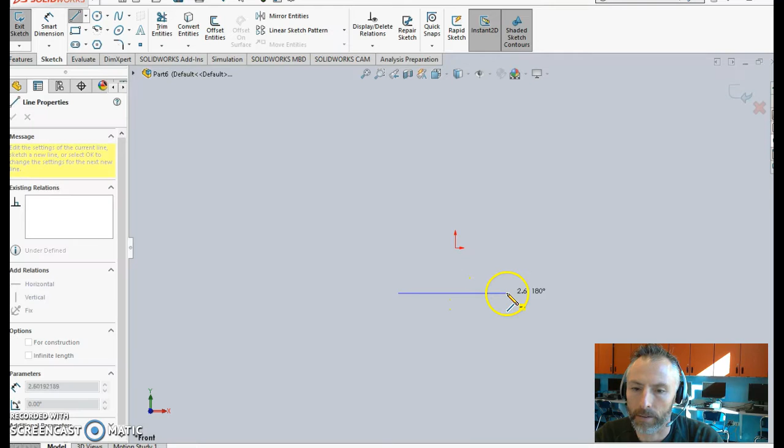What we know is that its bottom part is normal, its height is normal, but then it doesn't quite come out all the way, and it doesn't go all the way down. So it's going to look something in the ballpark of that from the side.

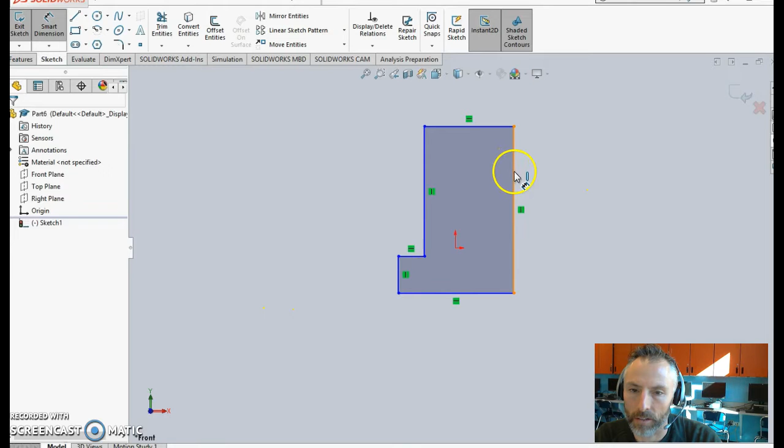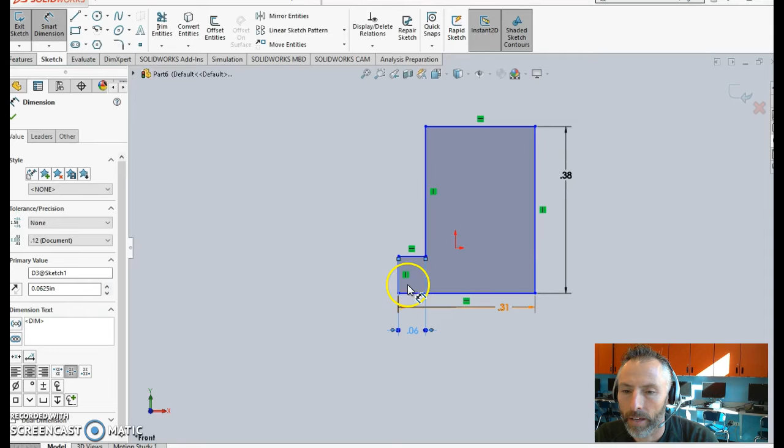Okay, so we're going to go with some dimensions we know. We know that the standard height for a Lego is 3/8. We know the standard width of a Lego is 5/16. We know that this little notch is going to be something just small, and we're going to call it 1/16. And we're going to call the height of it also 1/16. Okay, so it's going to look something like that.

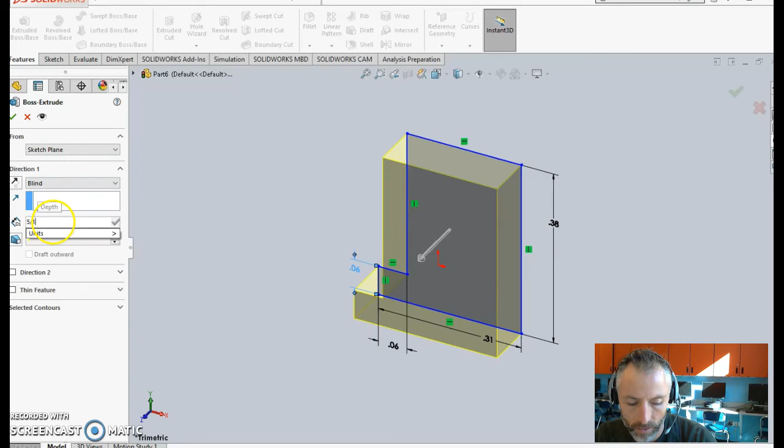And we can now go extrude, and we'll extrude it the standard width of 5/16, and we'll say OK. Now we need a couple knobs.

We're going to need a knob on top, and we're also going to need a hollowed out knob on the front. And we're going to have to cut out a little square area on the back, and we're going to shell the thing. Okay, so that's a lot of different features into this.

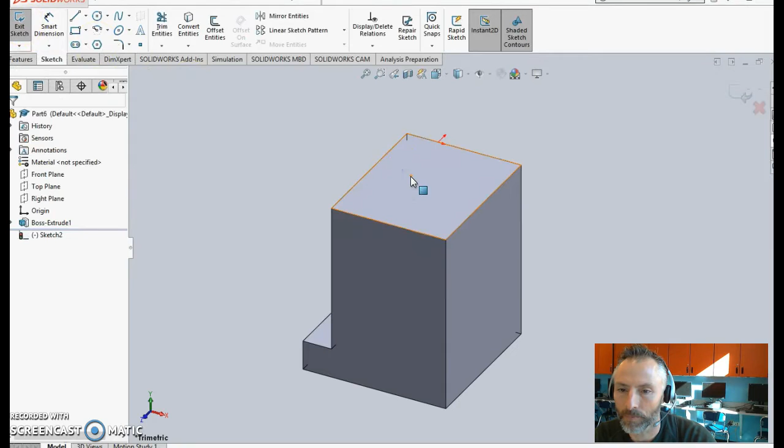Let's start with the knob on the top because that's the easiest. And we'll throw a sketch up here. And let's go ahead and look directly at the top face. And we're going to go circle. We don't know exactly where it's going to go, so we'll just throw it somewhere right about there. And we'll make sure that he has the right dimension. The diameter should be 3/16.

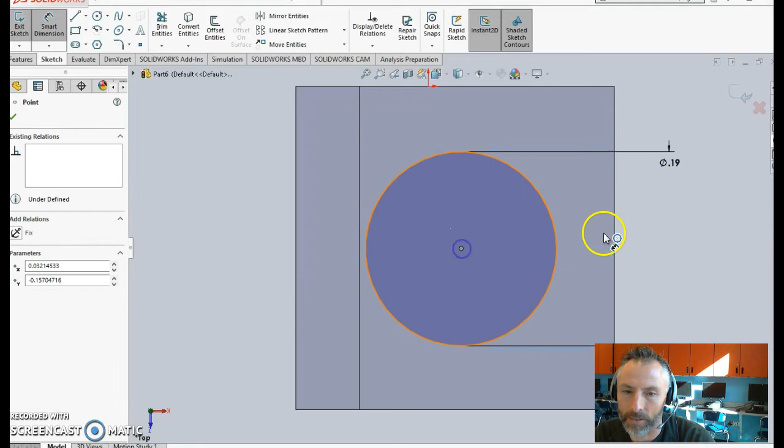And let's make sure he's the right distance. From the side, it needs to be half a Lego width, so it's going to be 5/32. And from the top, 5/32.

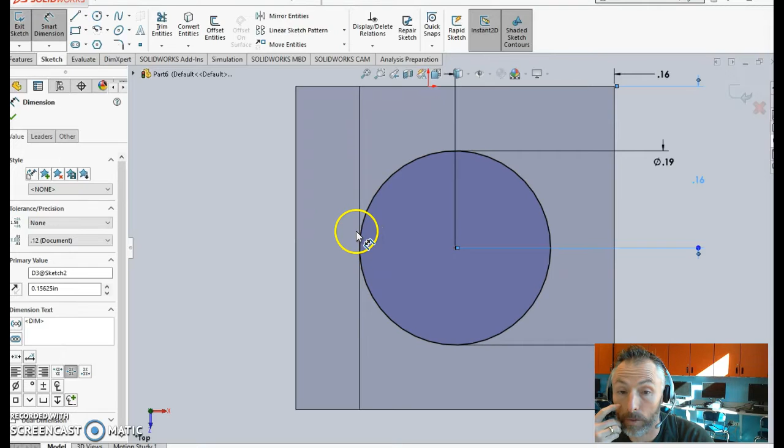And what you're going to see, that's going to automatically put the circle tangent to this little cutout, which makes sense. You have a 1/16 of a space right there, and a 1/16 of a space right there. The diameter of the circle is 3/16. So 1/16, 3/16, another 1/16 is 5/16. And if you remember, the whole thing was 5/16 of an inch wide. So it all adds up correctly.

We're going to go and extrude this little knob. It only comes up a 1/16 of an inch. So it's going to look like that.

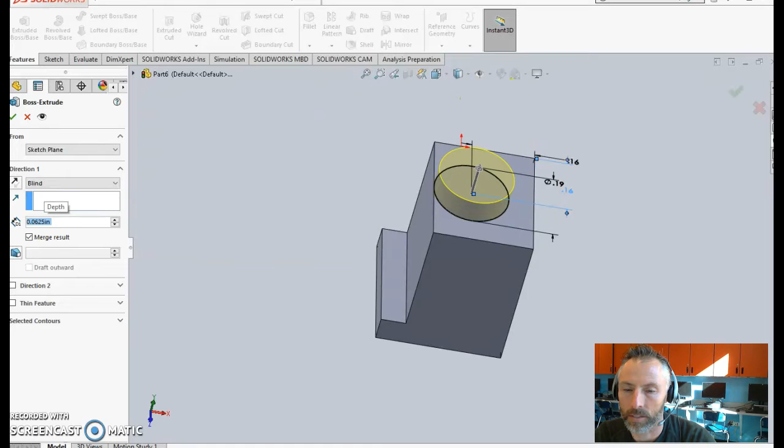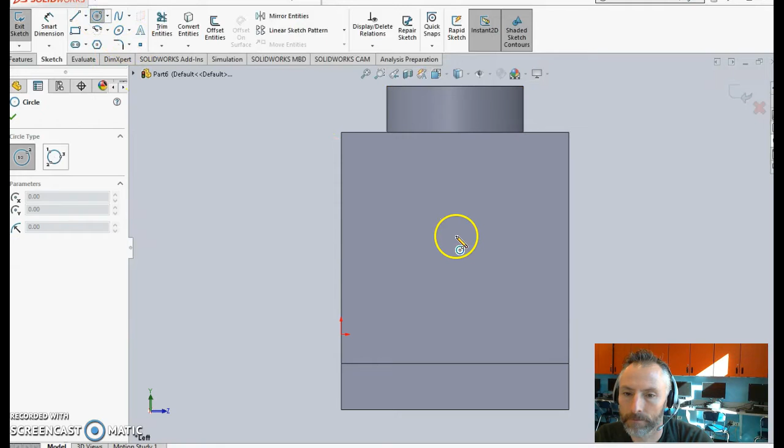Let's go ahead and do the knob that is now on the front. So let's put a sketch. And we're going to put it right on this face right here, which I believe they would consider to be the left face. And we're going to put... actually, I take that back, we're going to put 1 circle.

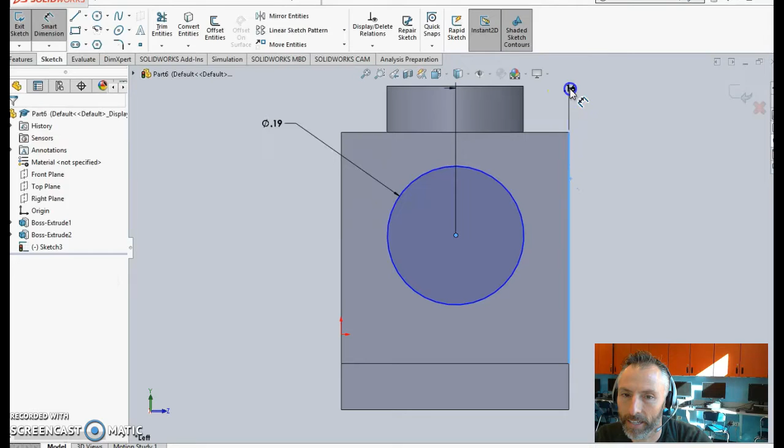And like all circles, it's going to be 3/16. And from the side is 5/32 like always, because that'll center it. But here's the tricky part. How much do we offset it from the top?

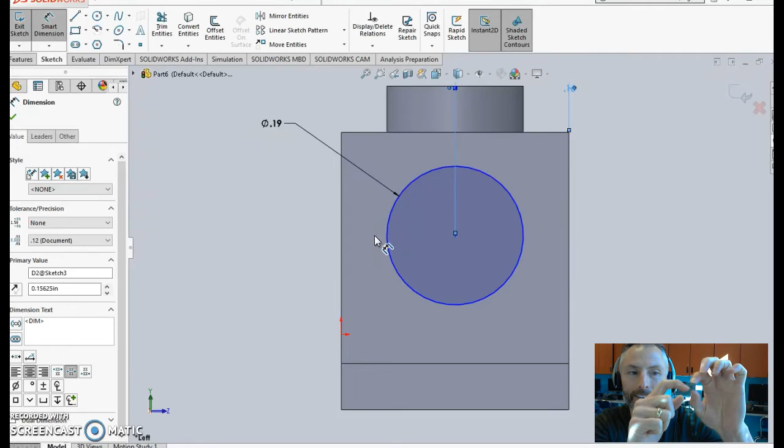Okay, if you look at this, that circle is actually slightly higher when you compared to the total height of the Lego. It's not perfectly centered, but it is centered between here and here. So with this, without this notch on the bottom, it is actually centered.

And you're probably like, well, what's he even talking about right now? Which is fine. So what we know, the total height of the Lego from here to here was 3/8 of an inch. But we have a 1/16 right there. So that 3/8, the total height of 3/8 is the same thing as 6/16. We have 1/16 right there. That means from this line to the top is 5/16, which means half of that is 5/32. So that is now centered within this face when we ignore this bottom ledge.

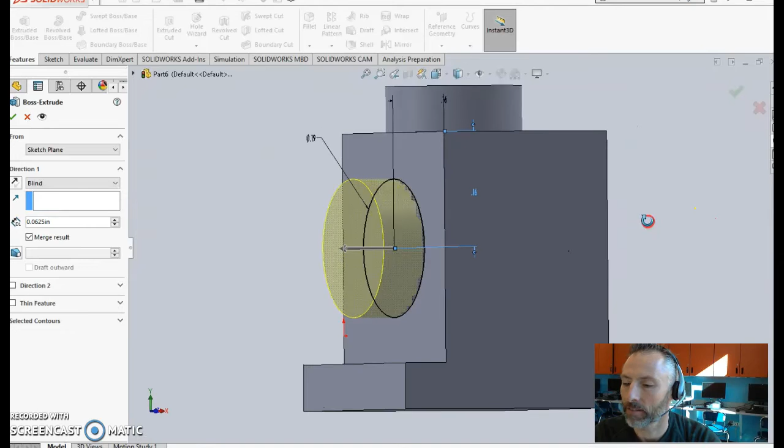That is where we want that circle to be. And now we're going to extrude this guy, we're going to have them come out 1/16, just like that. And we'll say, okay.

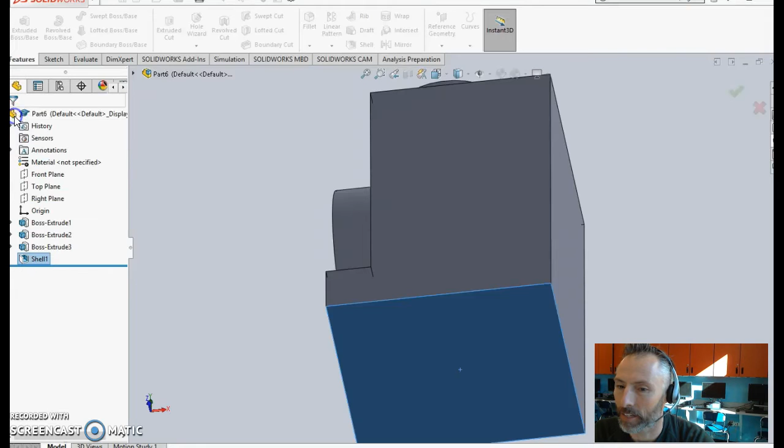Now we want some holes. What we're going to do first is shell this thing. So we're going to shell the bottom with a 1/16 thickness. We'll say okay. And you're going to see, like we saw in one of our parts before, it's not going to go through as much as we wanted it to.

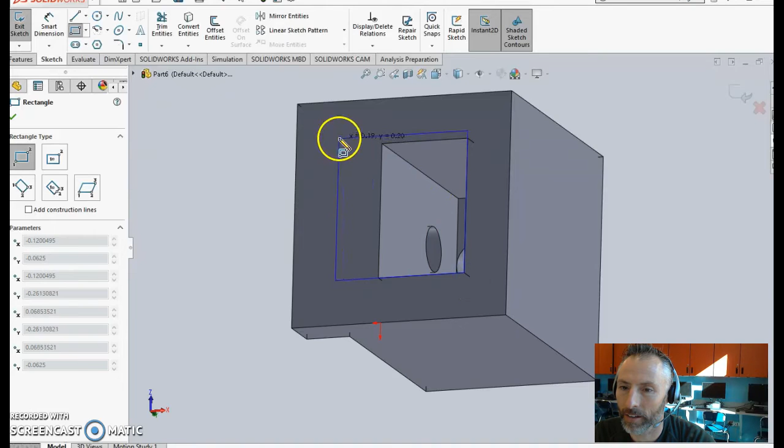So we're going to have to sketch on this face a square, from there up to here. Smart dimension - we need that opening to be 3/16 by 3/16 so that a knob will actually fit in there. So we're going to dimension it like that. And features, extrude cut, that in 1/16. And we'll say okay.

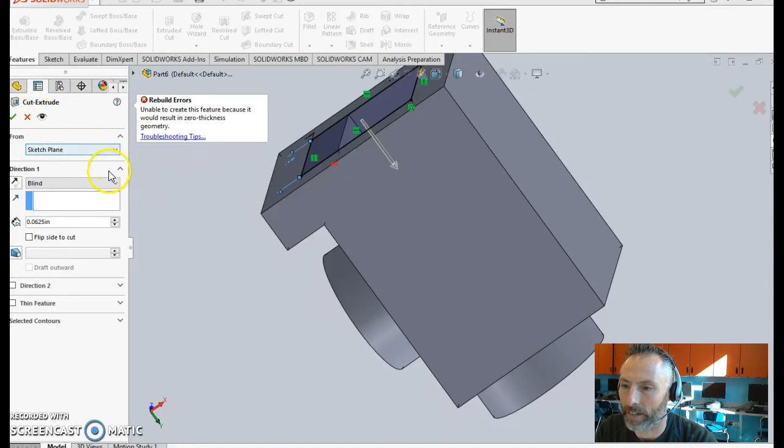And it's going to give a rebuild error. What it's not happy about is that this cut is actually going to come down exactly to this edge right there, which it doesn't like. There's probably a trick to getting that to actually happen, but let's just do this.

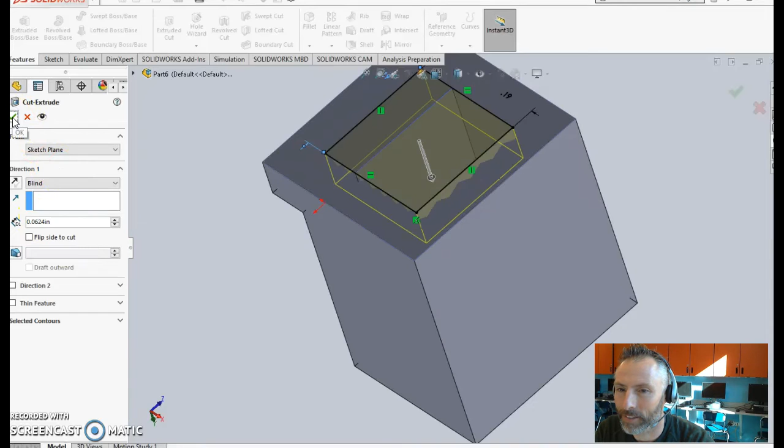Let's just trick it. We're going to make our 1/16 cutout ever so slightly less. So instead of 0.0625, it's going to be 0.0624. Nobody will ever notice. And we'll say okay. And now it did cut it out, and it didn't quite get through to that other surface. So there's a little trickery.

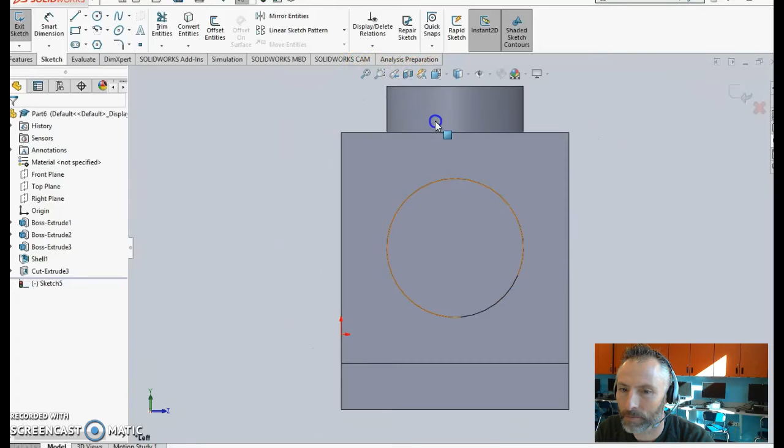We also want to open this up a bit. So I'm going to throw a sketch on this front face right here. And if you remember, this is what they considered the left side. And we're going to throw a circle right in there, because we want that opening to be like that.

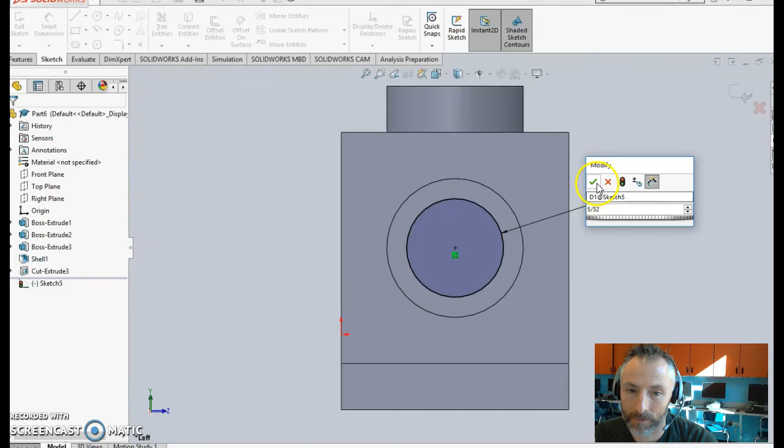And if we throw a dimension on here, what you remember, this outside was 3/16, and we want it to be pretty thin. 3/16 is the same thing as 6/32. So what if we make this inside one 5/32? It's going to look like that. And we can say okay.

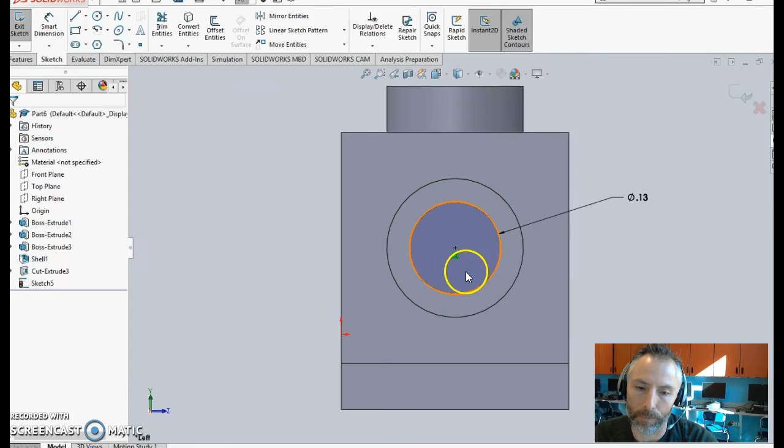5/32? Nah, I don't like that. Let's not do 5/32. We're going to make it 4/32, which is 1/8, which is correct. That is what it's supposed to be, because there's a lot of 1/8 type poles that would need to fit into here. So that's what it is.

And now we'll go features, extrude cut. And we're going to cut that so it goes in. And because of the shell, that should be plenty, the 1/16. And we'll say okay. Oh, see how it didn't go all the way through? Okay, so that wasn't enough.

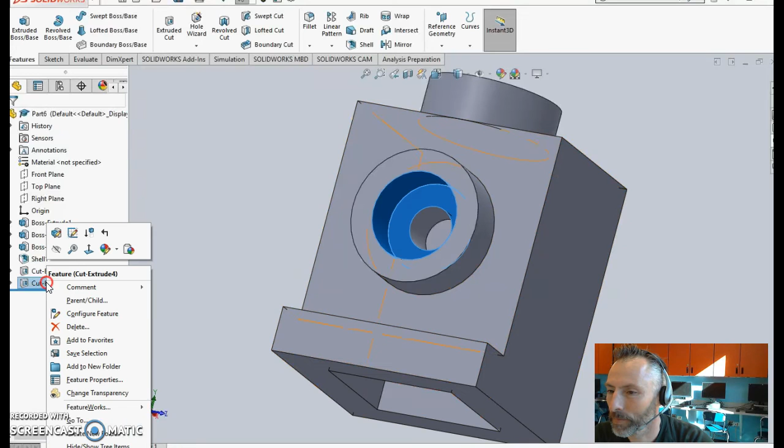So we're going to edit that feature. Oh, because I took the 5 off of there. If we put that 5 back in, if I go 1/16 and hit OK, that still isn't enough. Okay, we're going to double it. Actually, you know what? Let's just do this - we're going to have it go ahead and just say go through all, because we're going to be cutting a square.

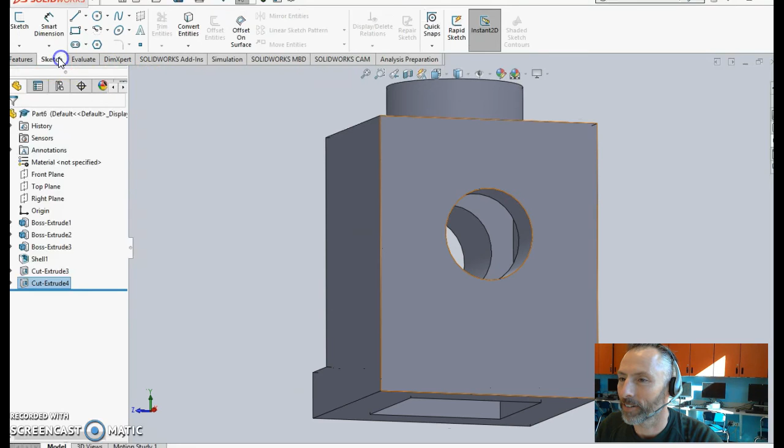So that's the front side - now it looks correct. We need a square cut out here. So that circle is going to help us figure out exactly where to put the square, because the square is going to go kind of around that. So we're going to sketch on this back face, and we're going to put a square cutout.

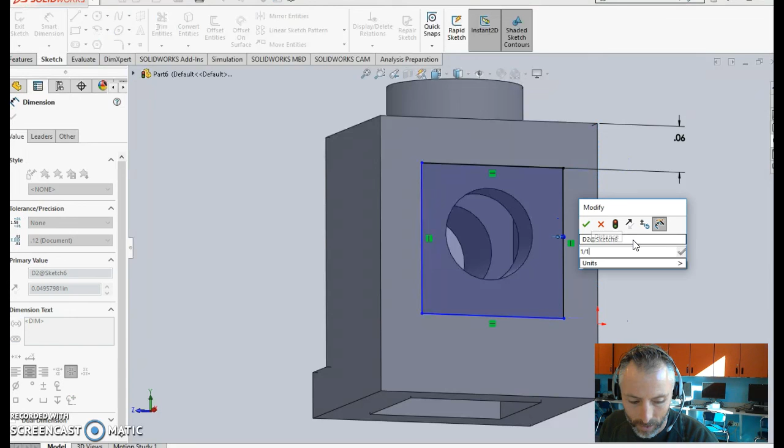And what I really know - yeah, I said the circle will be centered. I don't know if that's actually true, but what I do know is I want the spacing here to be 1/16, the spacing here to be 1/16, and the spacing here to be 1/16. And I want this thing to be 3/16 tall. So it's going to look something like that, and it does look like the circle is perfectly centered in it.

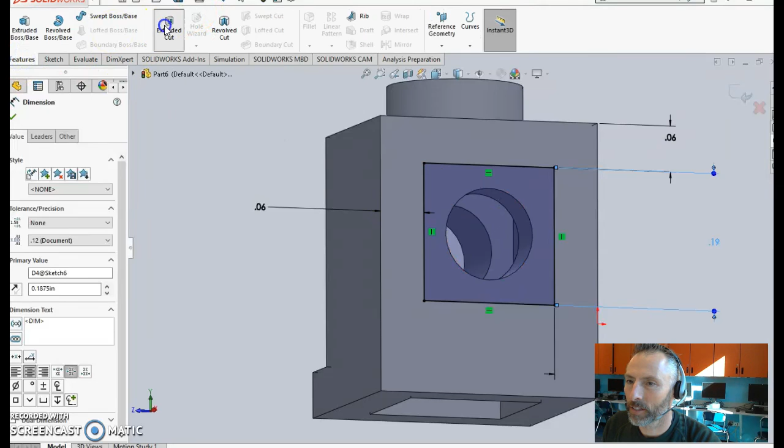And so we'll go back to our features and extrude cut, and 1/16 should be plenty. Let's actually change it to 1/16 and say okay. And now we have something that looks a whole lot like this. All right, you're going to save that as a 1x1 headlight piece.